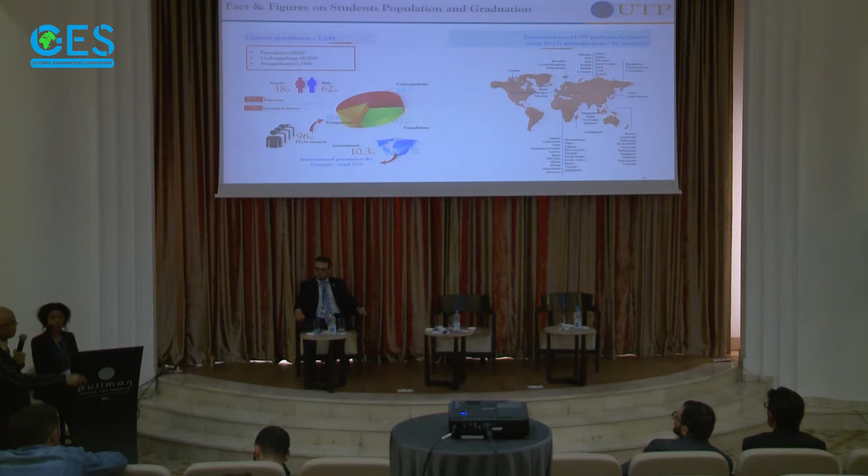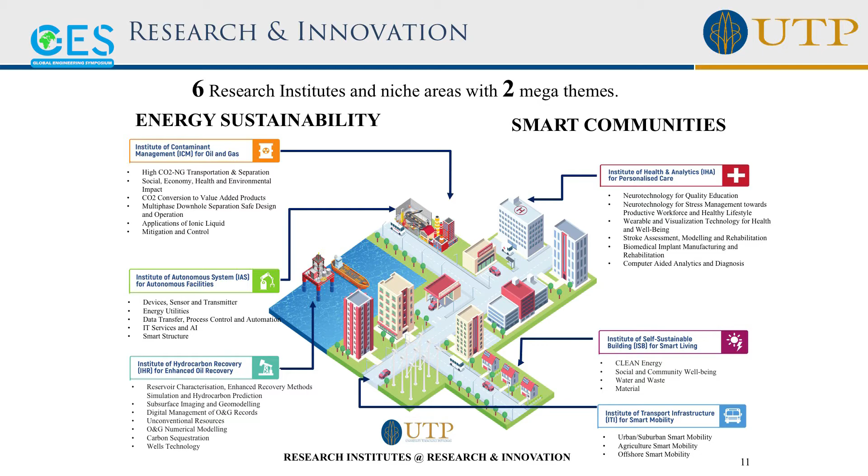I can skip this. These are the research centers in our country. Okay, now this is the topic that I'm supposed to discuss here. It's about our Malaysia's palm oil industry. Okay, if we put aside the oil production, this is our main income: production of palm oil, which is generated from the palm oil tree.

Yeah. It has been an issue in Europe where they are not happy with this kind of plantation because it displaces the forest. We have one of the largest or richest natural forests, and even though it still looks green, it's not the same as the rainforest. Okay? That's why, to overcome this, Malaysia has adopted a certification in order to comply with the requirements of manufacturers and other importing countries. That is not the thing that I want to discuss here.

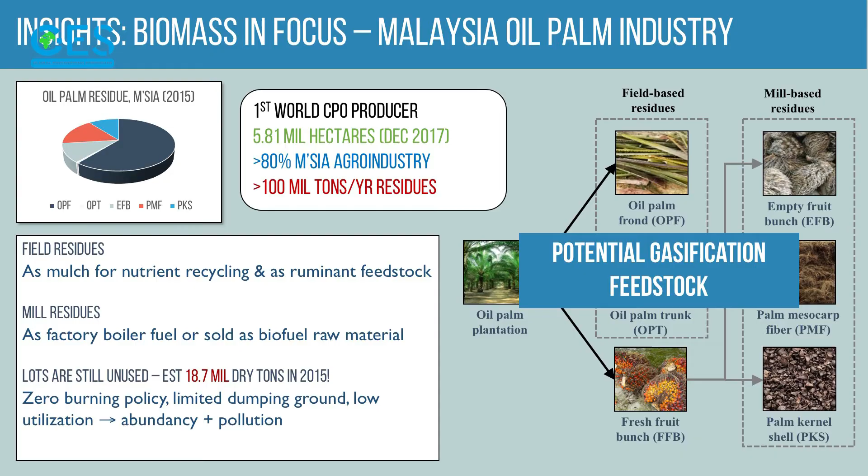Okay? I can show that there is an oil palm plantation. We have the leaf, which is normally called oil palm fronds. Every 15 to 20 years, we have to cut down old trees. Then we get oil palm trunk, also not utilized, just left abandoned, rotten like that. It cannot even be used to make furniture. And then at the factory, where they squeeze the fruit to get the oil, we have empty fruit bunch.

Okay, empty fruit bunch. This is a waste, but nowadays it has value. A long time ago, I asked my students to go to the factory to get these things. They could get them for free. Nowadays, the factory wants to sell. No way you can get it free. Okay? So people are competing to get these things because they have value. Other things are also wasted, okay?

But my focus in the last 10 years has been this thing, oil palm fronds, because nobody has really looked into it. And I think today I have some information about what I have been doing pertaining to this leaf.

Okay, the word gasification here may not be familiar for you, but to give you a clue, it is a process where you burn biomass or anything without enough oxygen. If you're a mechanical engineering student or chemical engineering student, you may have heard about combustion. To have a successful combustion, you must have sufficient air, right? Without enough air, it won't work.

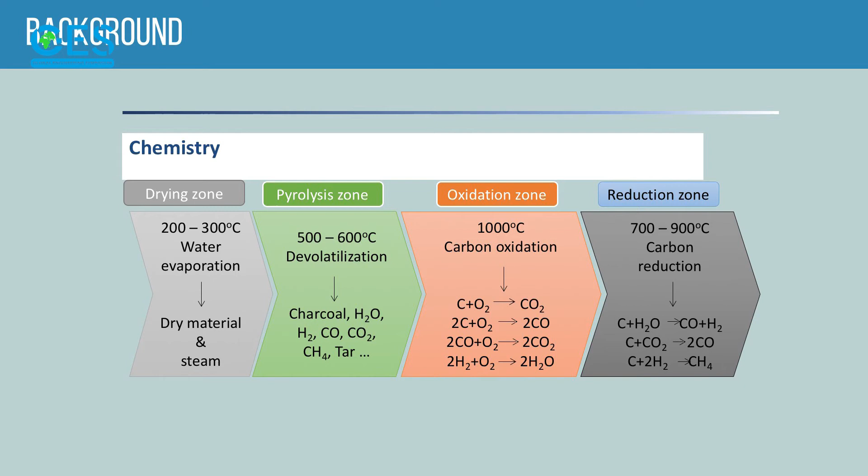They are all combustible. And to share with you, in case you don't know, during World War II, when oil was not easy to get, the Germans used this method to run their tanks because there was not enough fuel. So this was real. You can just Google gasification World War II. You can see many examples of vehicles being powered by this method. Only that after the war was over, people didn't care about it because oil was easy to get.

Right? But then, after the oil embargo of 1973, have you heard about that? The younger generation, you need to Google what is meant by the oil embargo or oil crisis of 1973, when the Middle East countries refused to sell oil to the world. At that time, the Americans and many Western countries started to think that we cannot rely on these countries. We have to become more efficient. We have to find resources so that we can become less reliant on oil. So gasification after that came back into the picture.

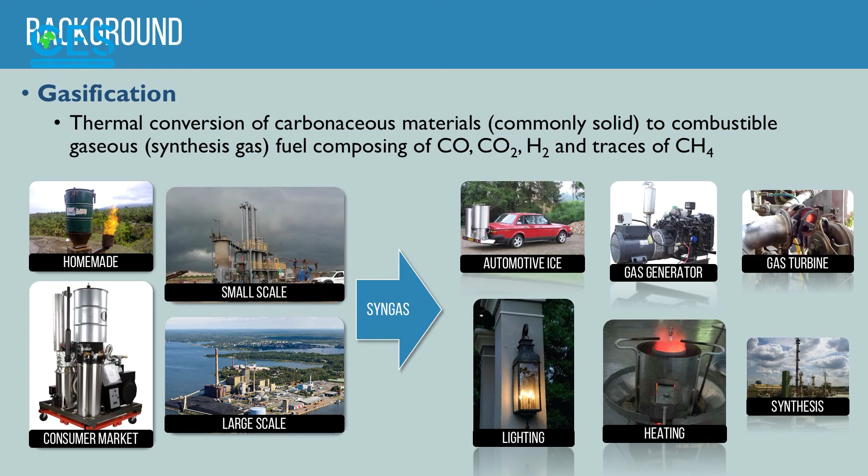Countries like those in Scandinavia have been using this method to generate electrical power. Some examples of utilization of gasification: basically, you can see small scale or large scale plants for electrical power generation. This one is not so nice. I won't do this, but it has been proven by someone that they can install a gasification plant to run a car. And there are many cars here, but at least it proves that it can be done.

I think I can skip this. We don't have much time. 2 minutes, 3 minutes. Okay, I have to run.

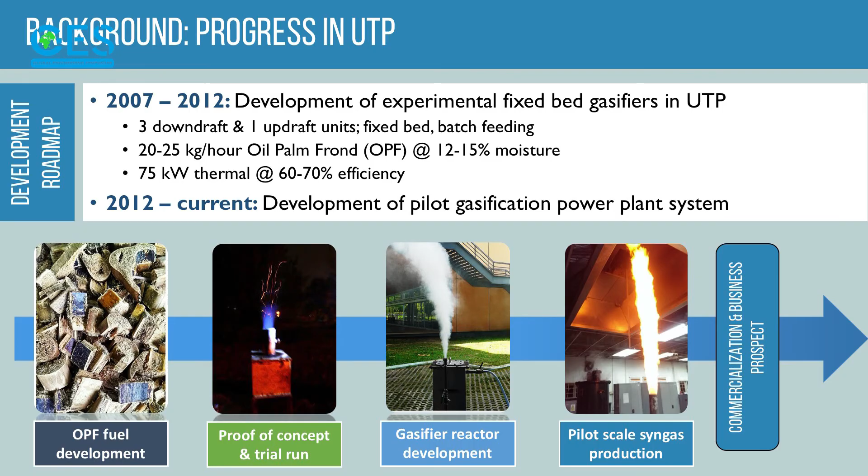This is what I have been doing with my students in the last 13 years. We have been developing some gasifiers, which are just small reactors, and the cost is very low. See, just some kind of a box, which is quite easy to fabricate and doesn't need high accuracy. You can ask anybody to fabricate it, and it can be completed in about 1 month. And the product is a combustible gas as a result of this gasification process.

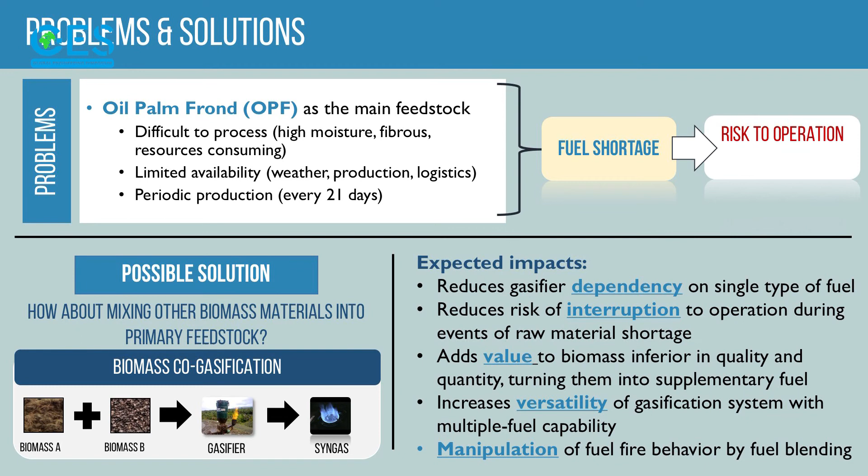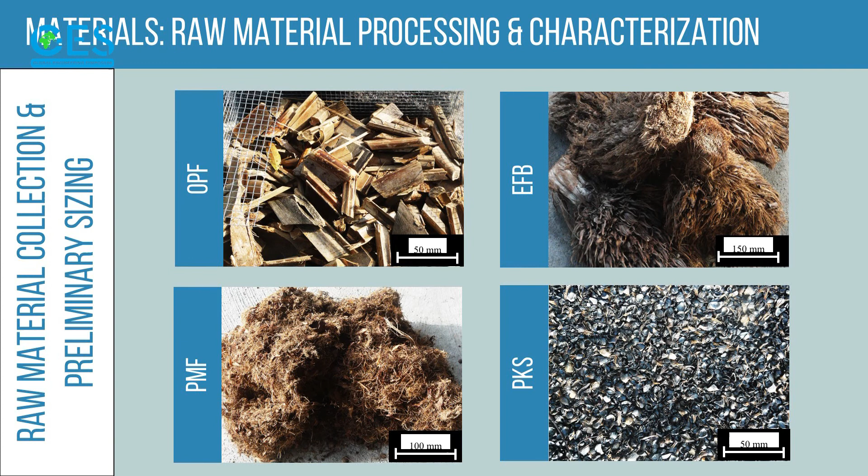And in terms of co-gasification, even though I mentioned that we use fronds, we imagine that one day fronds will also become something that people compete to get. So it would be good if we can blend them with other materials. These are the candidate materials that we use. This is fronds. We can also use empty fruit bunch, palm kernel shell, and some kind of fiber from this plantation.

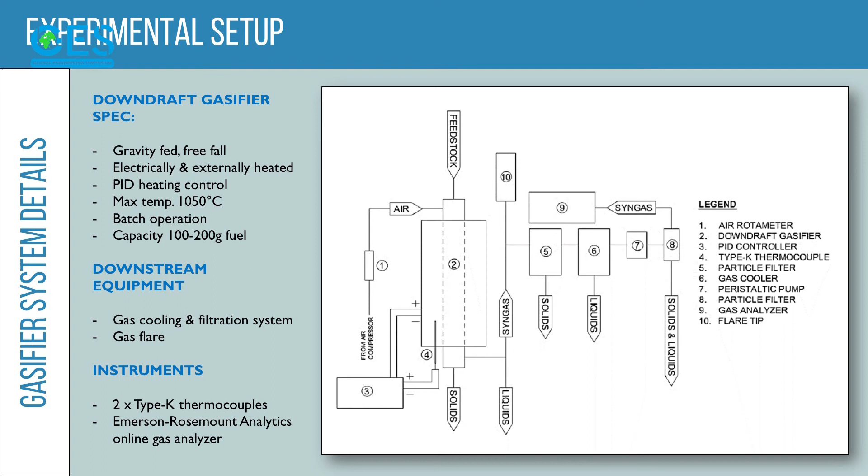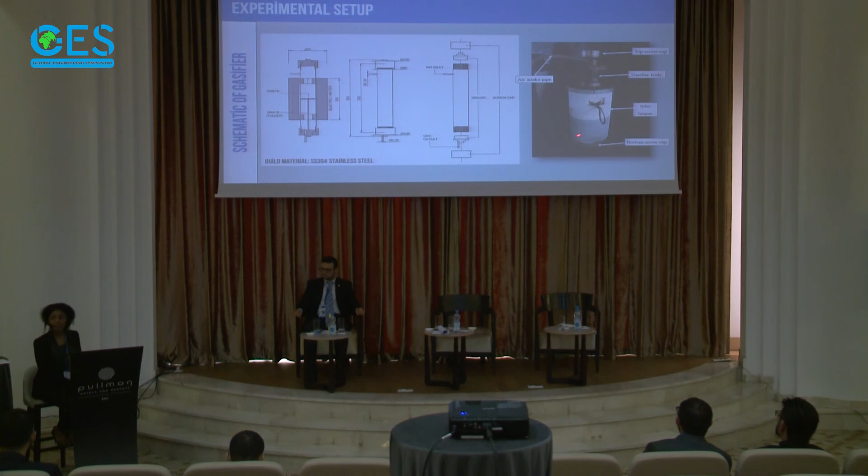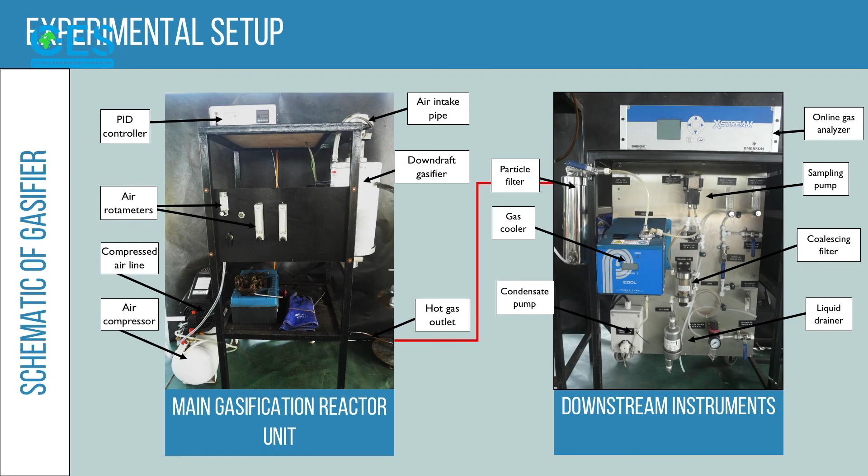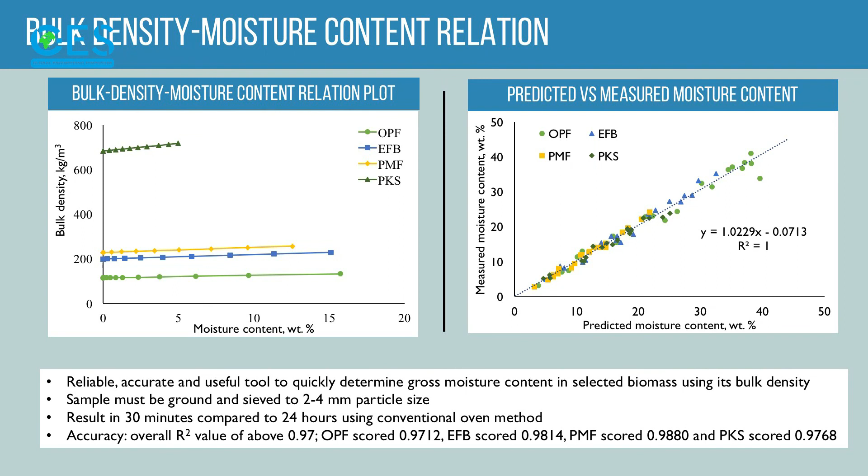That is just a schematic of the gasification system. The picture of the gasifier, which we constructed ourselves. This one uses electricity, one of the most recent ones. Some of the auxiliaries that are required to operate the system. Some results, I'm not going to spend time on them, just to show you what we've looked into in order to tell whether the process or the material is suitable or not. You can ask me if you have concerns on this, but I've just run through it.

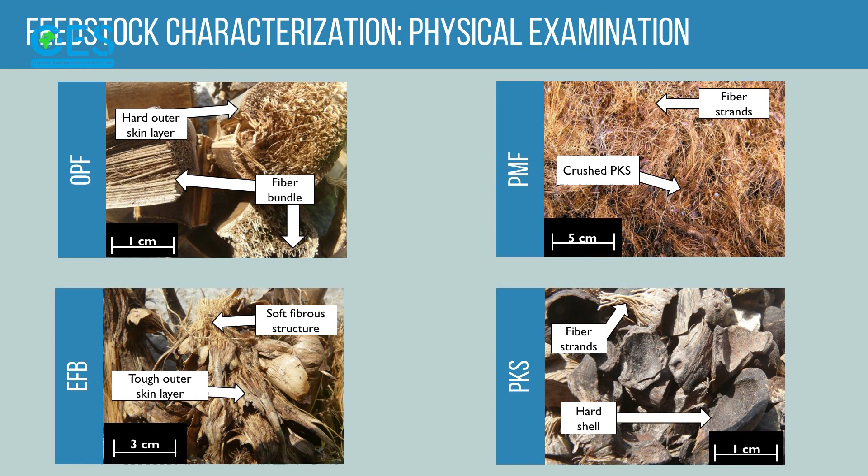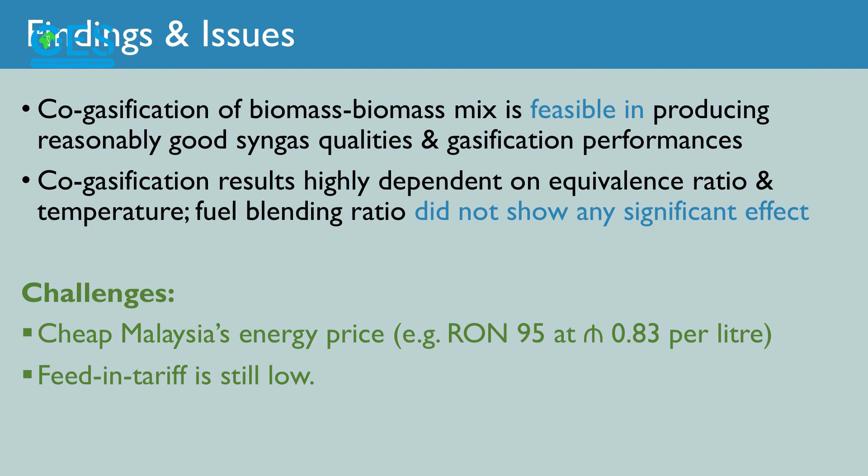The only thing bothering us for now, the challenge, is that the price of fuel is still cheap in Malaysia. For example, RON 95 is almost the same price, right? So we are almost like you. So nobody cares to use renewable energy. They say this fuel is still cheap, why would we use renewable energy? So probably 10 or 20 years from now people will open their eyes, and that is the situation for now.